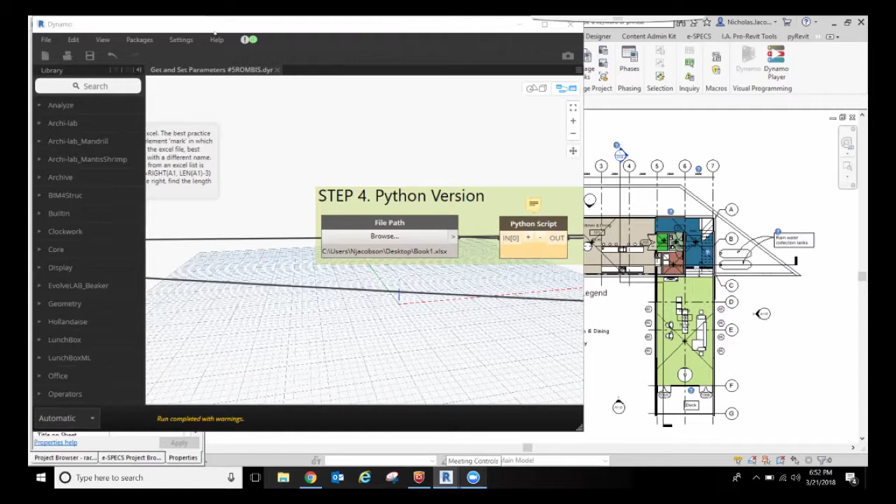Anytime I use Dynamo and we're experimenting, I always use the Revit sample project. I like to get in there and just destroy it because I'm not destroying any other project -- I can mess with it and always get it back. Through this, you start to find all these little, I don't know if they're errors or overlooked or intentional, but there's a lot of weird things. Were they done on purpose? I have to believe they're done on purpose, right? But we find all these sorts of things, so it's fun.

What I want to show you is we work on a lot of multifamily housing projects. When we're working through the projects, we number our rooms with a certain numbering sequence, and then the U.S. Postal Service comes back at some point and says, no, we want to rename them based on our numbering system. We take our best guess, it's never right. So all of a sudden we have a project with 1,600 doors, 800 rooms or something like that, and we have to go back and renumber every one based on the U.S. Postal Service, which means we also have to renumber our doors. We've gone through all that work of numbering our doors, and we put the letter next to it.

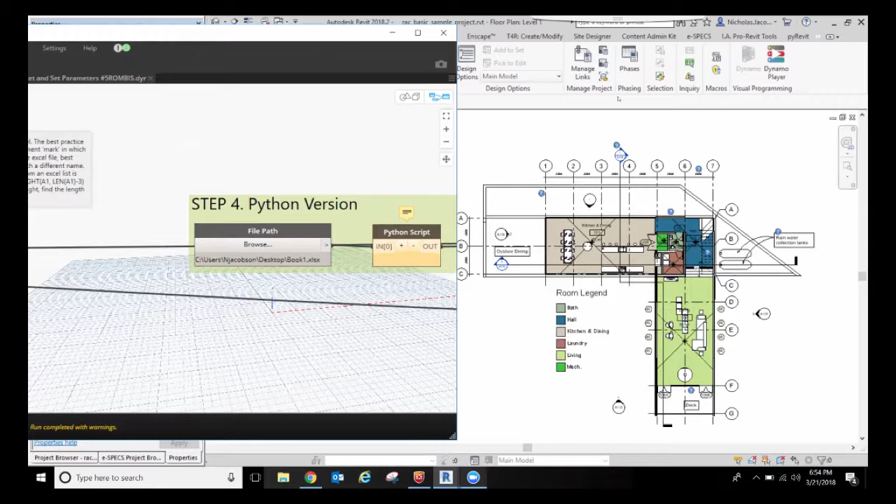The way we renumber doors -- and I'm buying time to tell you the logic, because if this doesn't work, at least you understand the logic, probably won't work, but the most important thing is understanding the thinking process -- we renumber our doors based on the way the door swings into the room. If it's swinging into the room, it gets the same number as the room it's swinging into. So this is room 8610, that would be door 8610A, 8610B. The A and the B are always there. It doesn't matter if the room changes, we still want that A and the B -- it saves a little time. So somebody comes to me and says, how do we renumber all of our doors to the room they're opening into, but save those letters? It's kind of trivial. If you do it manually, it would take you days for something with 800 rooms.

But this method will save you a lot of time.

I always work in Python because I have a lot more flexibility and I know it a lot better. So if somebody wants a script, I've done it in both long form Dynamo and also in Python. So that way you can go in, you can understand the mechanisms, what's going on. So if you get this, I don't know if we're going to pass them out, but you can get in there and you can start to play with it and you can understand what the mechanisms are and speak the

language of Revit. So what we're going to do here is we're going to get all of our doors as they are with the number and the letter. We're going to export that to Excel because Excel is like this awesome tool. Everything we do uses Excel because we can change things really quickly. So I'm going to export everything to Excel and then I have it. And now I can do anything I want with it. I can change the numbers sequentially. I can bring it back in.

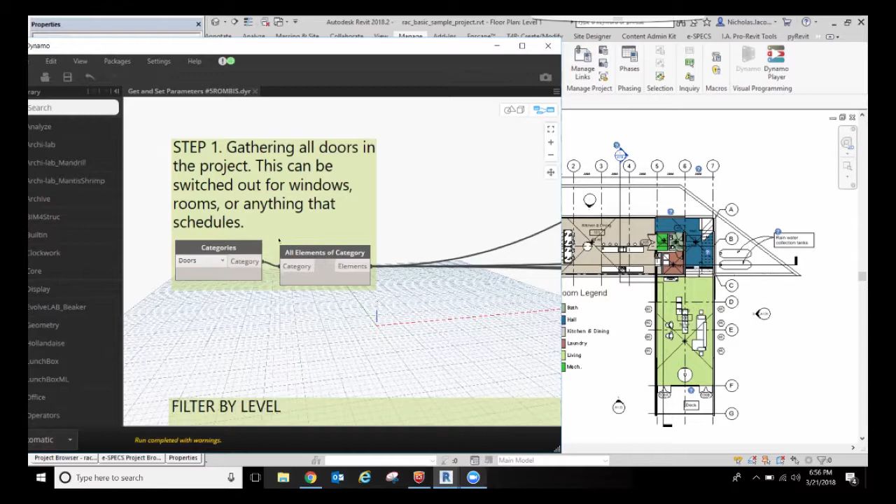What I'm going to do is I'm going to try to separate the door numbers from the door letters at first. So I keep all of those letters the same, get rid of the numbers. We don't need them. We have new room numbers. Then we're going to try to find the new rooms that the doors are opening into, get that number, and just put that on the front side of it. Pretty simple. So the first thing that we do is we get our categories.

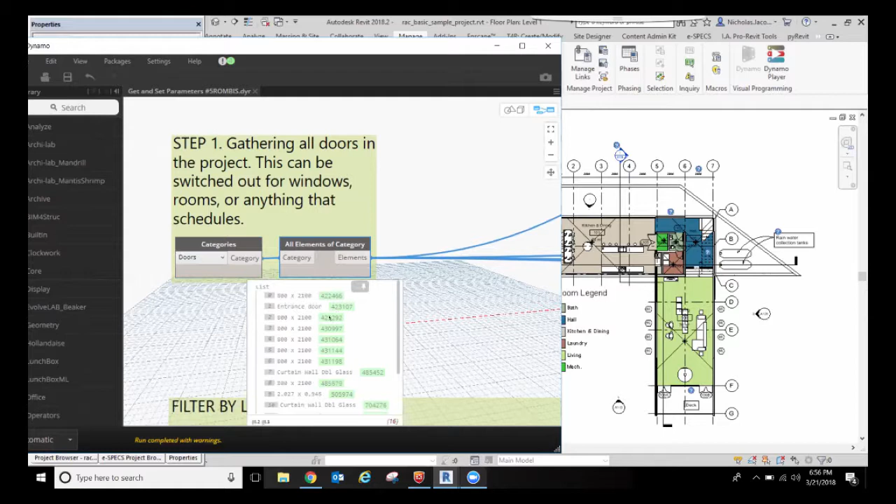This is a pretty standard way of starting, and we're going to get all of our doors, and we're going to get all of the elements of that category, which is basically getting all the parameters that are associated with this door. The cool thing with this is that we can go through and you can click on any one of these. And I'm lucky that mine is popping up. And I can click on one and it will take me to this door, which is this one right here. So it's a quick way of being able to access all of this information.

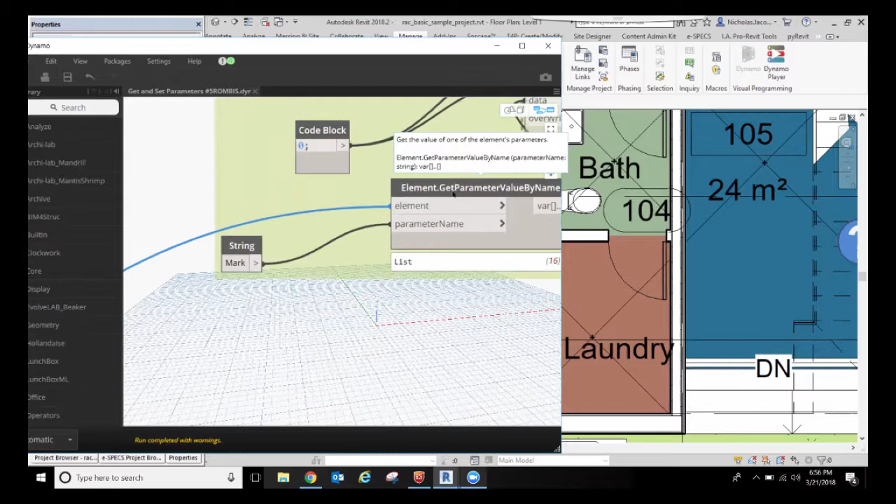Now that I have that, what I'm looking to do is, what I said, get the number and the letter. And so in Revit, that's known as the mark. And I will show you that right here. I know this is really simple, but it's helpful to see it all. Properties. Select. And what we're looking for is not the name, not the number, but the mark. This is 105. And here's what I'm talking about when the sample project is a little bit weird.

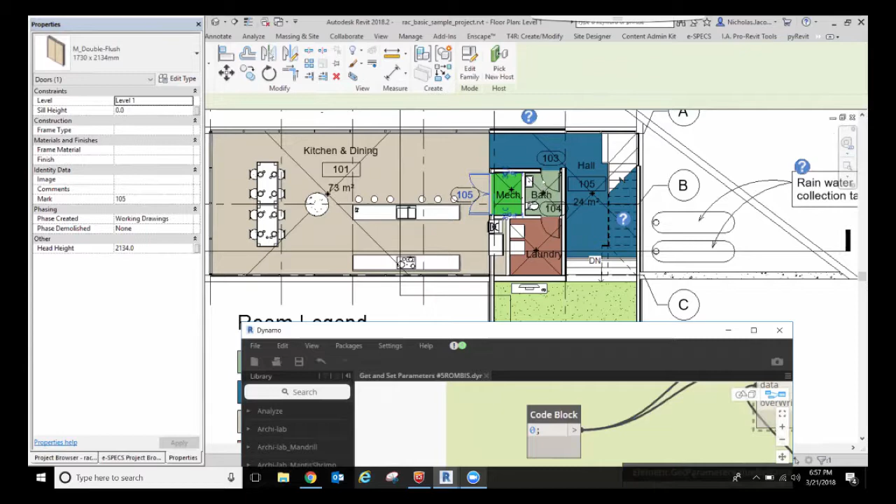All of these doors have the right number associated. So this is 103. It's going into 103. But this one right here is named 105. It's going into room 101. So there's all kinds of little things like that. As a sample, we're just going to change that. I'm going to change this to A. So we have that for proof of concept. And if this works, it should say 101A.

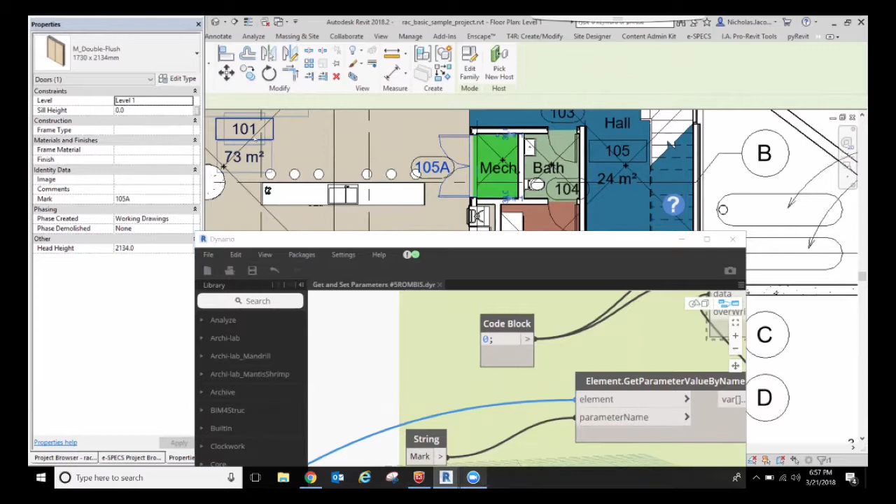So now that I have the mark, I'm going to use this little program that's write to Excel. This is right out of the box. We've already talked about this. I'm going to use a file path, and that file path is going to write to an Excel file. In order for this to work, you already have to write the file. So it's kind of a weird little workaround, but

I open up Excel. I'm going to start a basic project. I'm going to save it to my desktop. I'm going to say, in the spirit of RoMBIS, RoMBIS, save it to my desktop. And I can get out of that. Now, I'll use this file path command. I'll go back and I'll grab it. If you don't do that ahead of time, it won't let you. It's really kind of strange.

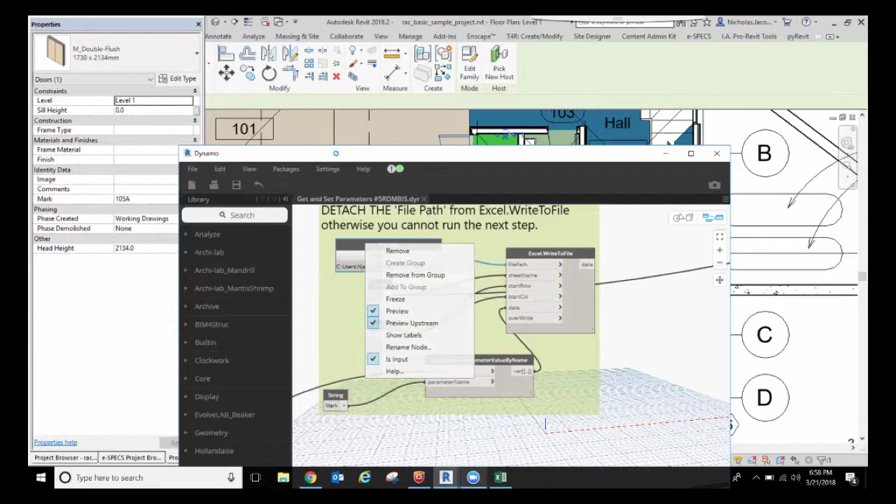I always freeze everything. That way it doesn't work when I don't want it to. And I always keep it at automatic. So that worked. Now I have all of my doors just as they were in Revit, only the mark. I should have 105A right here. Okay, cool.

Now, because I hate losing information and I'm kind of neurotic about it, what I'll do is I will save as, but with a different name after it. So that way I have a separate, fresh piece of information that I'm working with. I'll get out of that. And I like to keep all these things separate.

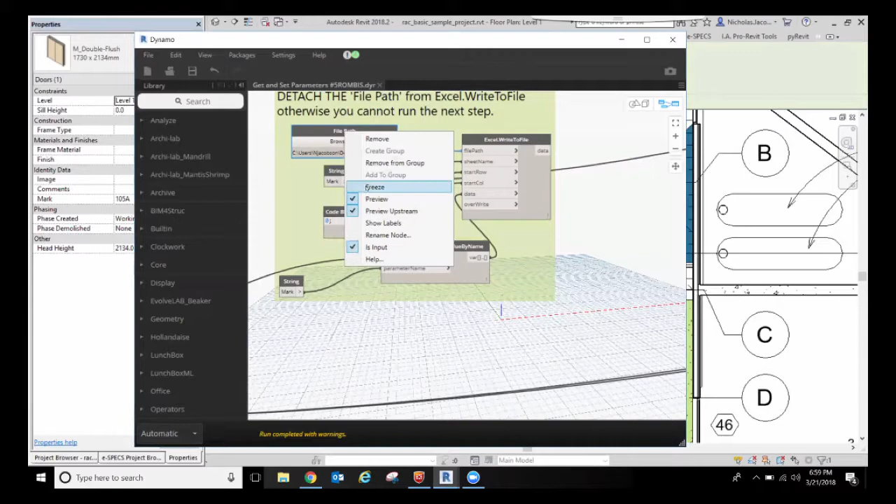So the next step is that I'm going to bring it back from Excel, but I'm going to modify it in Excel. I'm going to get rid of all of those numbers so I just keep the letters. And I will bring back my RoMBIS 1. And in RoMBIS 1, let me open this back up. I should have.

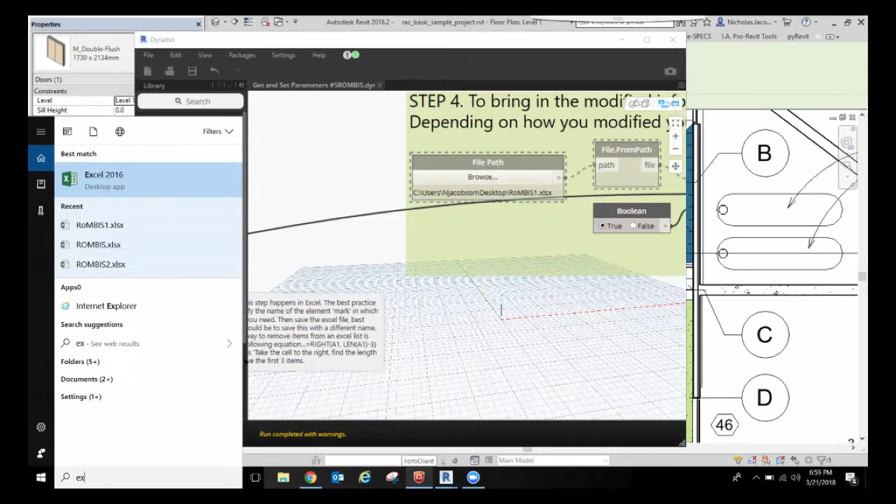Here's where I'm going to work on it. So there's a really cool hack, and you can even program in Excel. So what we're going to do is we're going to get rid of the first 3 letters here. And the way that you do it is type in RIGHT, which means I'm going to get whatever is to the right of my column, which is going to be A1. I'm going to calculate the length of it, starting at A1.

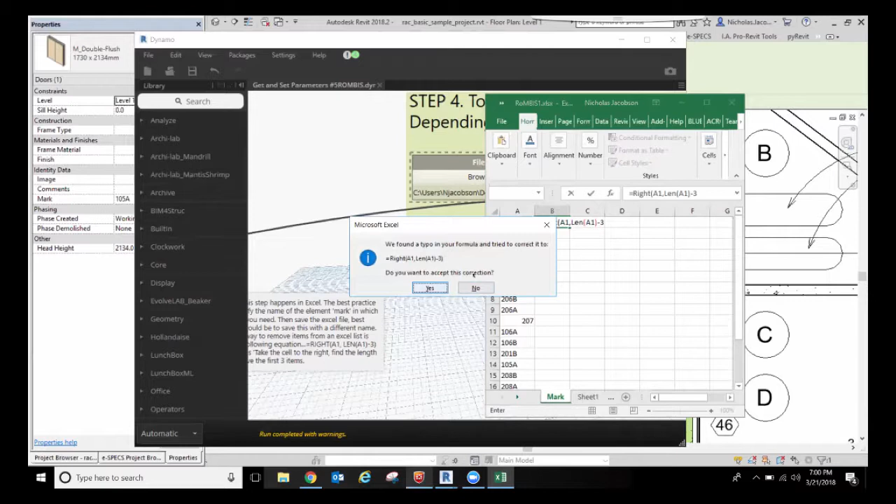And I'm going to subtract the first 3 numbers, starting from the left-hand side, right? Sure. Now that I have this, I can just pull this equation all the way down, and it automatically does this. So when you have 1,600 doors, that goes really quickly. And this is really what I want. Now I have this in a separate row as well.

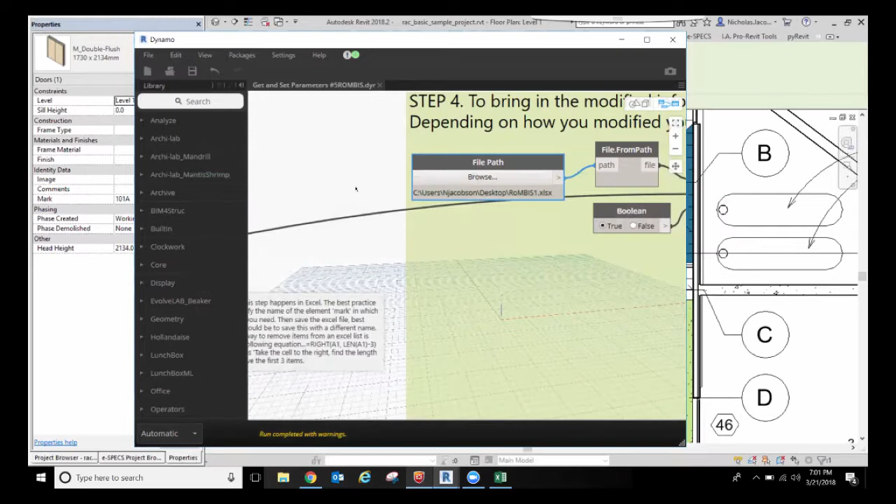I'm going to save, get out of this. I'm going to open this up one more time, and I'm going to unfreeze. And it opens for me. So what we're looking for then is the whole process: file from path, read from Excel. This is all pretty standard. The way that this comes in is broken out into 2 different lists. So I want to put them next to each other. It's kind of list management. I'm happy to explain in depth later.

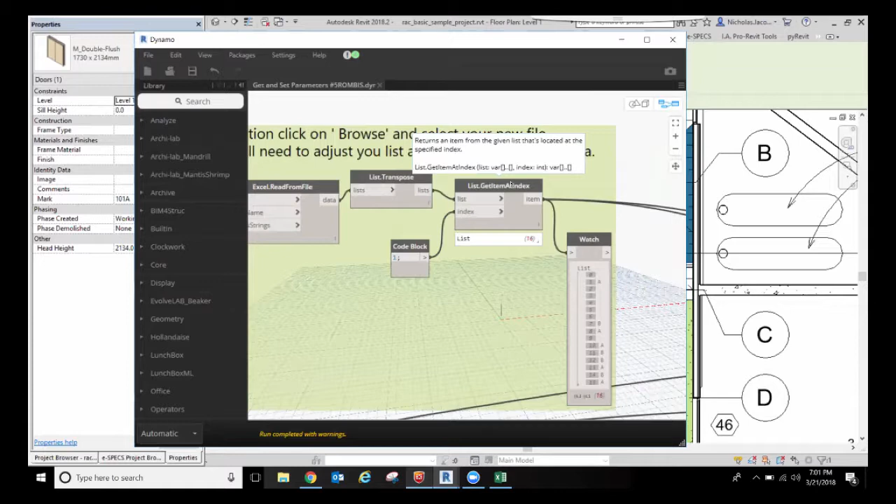And then what I want is I want to get an item at index. And my index is going to be that second row. So in Excel, I have basically row 1 and row 2, or row 0. In computation, you always count 0 as the beginning. So this is row 0 and this is row 1, and we want just the letters, meaning that that's the only part we want to keep.

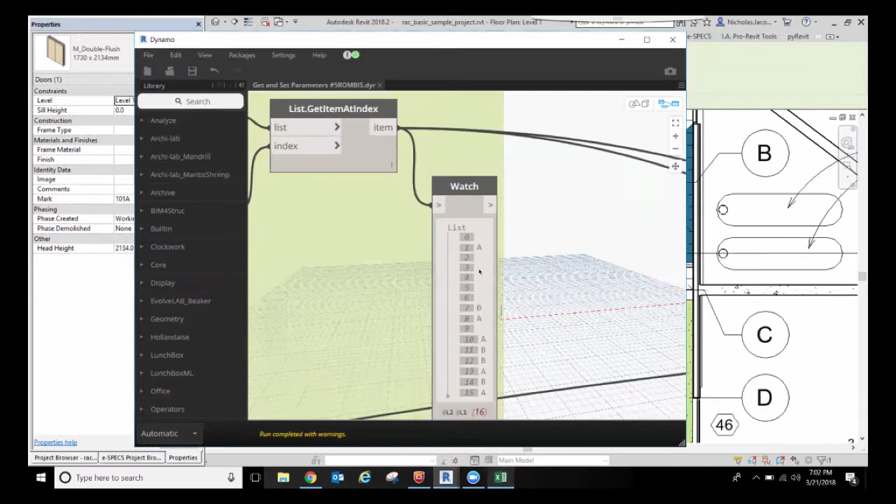And so this works. Now the next part is we want to get the parameter for the room that the door is opening into. We want to get whatever that number is. And the cool thing about Revit is that almost all doors have this already built into it. I don't know who the genius was that did that. That was you. I'll give you credit for that. But that's already there. All doors in Revit already know what room it's going into and what room it's coming from.

Caveat. Yes. If you copy a door, it keeps the previous room. Yeah. Can you repeat the question? So the caveat is there's 2 caveats actually. If you copy the door and you place it again, it keeps the parameters that it already had. And the other one is if you mirror it, it loses all of its information. So we also have other scripts that say, select all the doors that have been copied or mirrored, tell me who did it, and then I can yell at them and make them fix it. So we have that. There's a few little caveats.

But the cool thing is it already has information. So there's a couple different programs out there. There's one that you can download, and it's just get to from room. There's a whole bunch out there. You could even script it. And it's pretty simple. There's a little Python script, but it's not too complicated. Basically, the Python script is saying, get the to from room, put it here, separate it out by the to room and the from room.

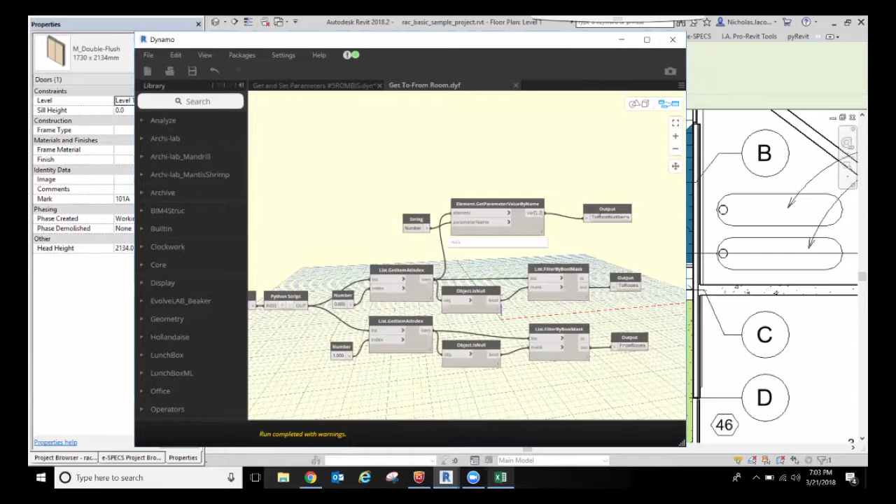And then I modify this. And the cool thing about once you start to understand this and you start to understand Python is you can modify it for your own uses. I'm just getting the number of the room that it's going into. So once I have that, it's telling me, here's all of the rooms, and I'm appending them to the letters. I'm putting the room number before the letter.

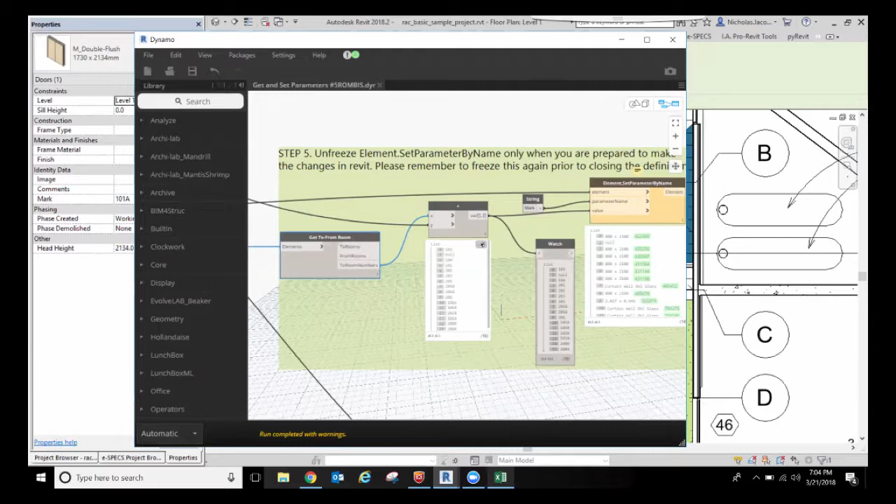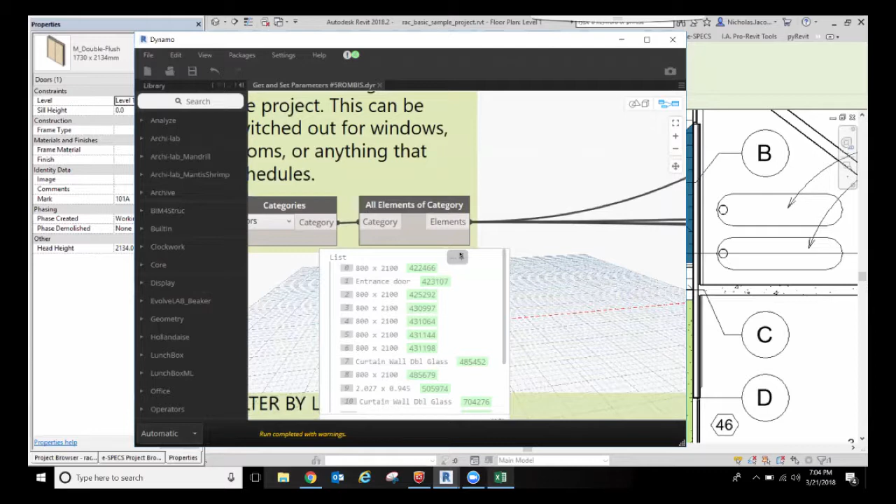Frustrating thing is, if you see number 1 right here, it says null. So if I were to run that, I would get all kinds of problems, like this. It would say there's something wrong. So if I go back to the very beginning, and this is a little bit of debugging 101, it was in the first position, and let's find out what that was. It's an exterior door. Most exterior doors, there's not a room on the other side of it. So one of the little hacks that we use is I go and I find that door.

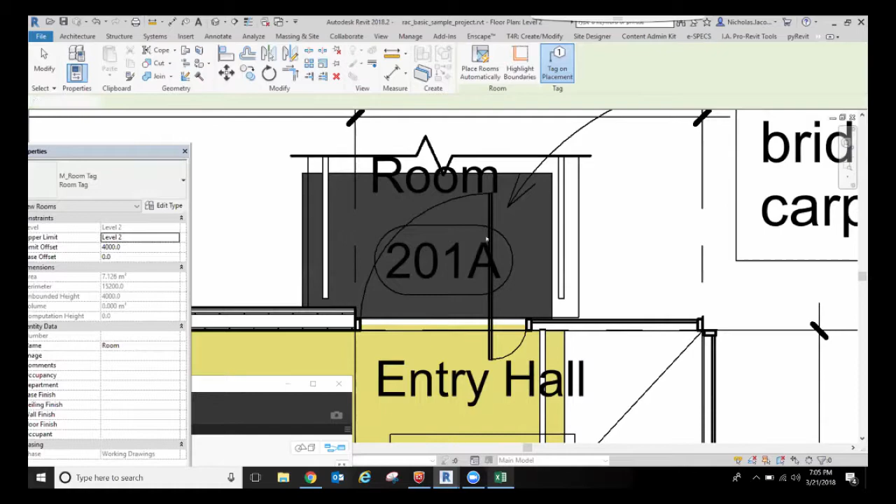Oops. It always tells you you can't find it, but then it does. I don't know. Bring this down. Architecture, room separator. No. And I will make a little room around here just to show you that's what the issue is. Okay. And because I have that set to automatic, it's going to run. And we'll zoom back out. And with any luck, that null is now taken up with 209A.

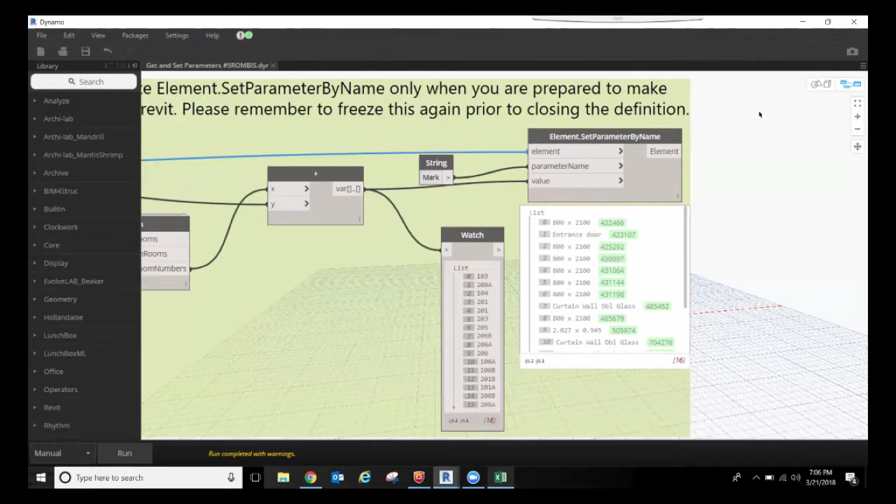The whole issue is set, and the program has already run. And just to make sure, run it again. This last bit, anytime in Dynamo it says set, that's kind of like bake in Rhino. It's giving the handshake back to Revit and doing something. Get is getting information from Revit, and set is putting it back and actually doing something. So it's one of the last things you want to do, because if you're not 100% sure, you'll screw stuff up. So now that we have that, I'll go back, and with any luck, my room 101A will be there.

Did you bring the element ID with it, though, so that it tracks it differently? You know, you probably can. We've gone down this route before, and I've just found this to be a lot quicker. Because what we have done, if you follow it far enough, you end up deleting things or things get shifted. This I know for sure works.

And there's probably a way to do that a little bit more, but we haven't explored it just because this has been so quick. And usually with these scripts, we spend maybe half an hour on them, and then we're on to the next one because we don't have a budget for R&D yet. But hopefully with being able to show this, like last week we used this and we were able to save billing additional services to a client. That starts to get noticed. And then you can slowly work into getting more and more R&D and playtime and working on design.

Just back to the caveat, have you found a workaround for that? Our workaround is just to find them and correct them. Okay. Because we had a CAD file of the building model in Revit. And when they got in there and started adding doors, they just started copying. Sure. So it's got all the old room numbers on the fronts. Yeah. The other workaround is just to model it right the first time. But that never happens.

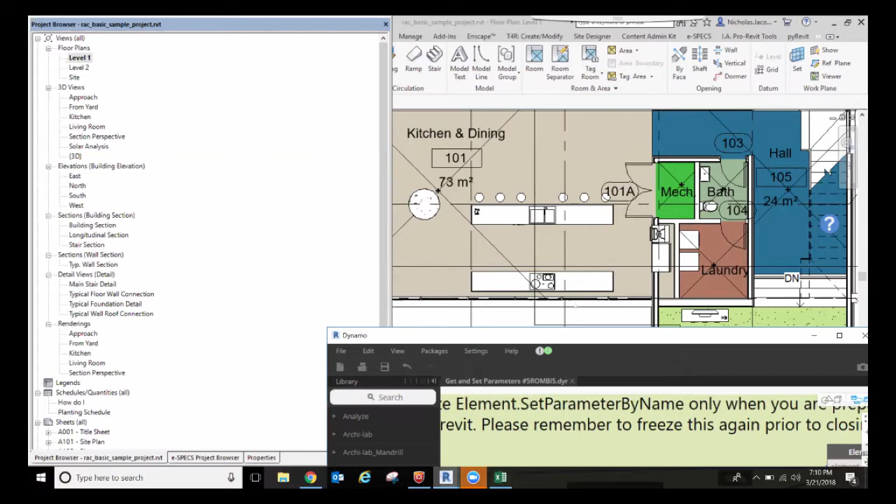I do. I didn't know if I had time for this. I don't have time for this, but I'm going to show you. Sure. So the question is, if you have such a big file that it's computationally too expensive, meaning you don't have the computational power to run through all of them, what's your next solution? The next solution is to break it up by level. There's all kinds of different ways that you could break this up.

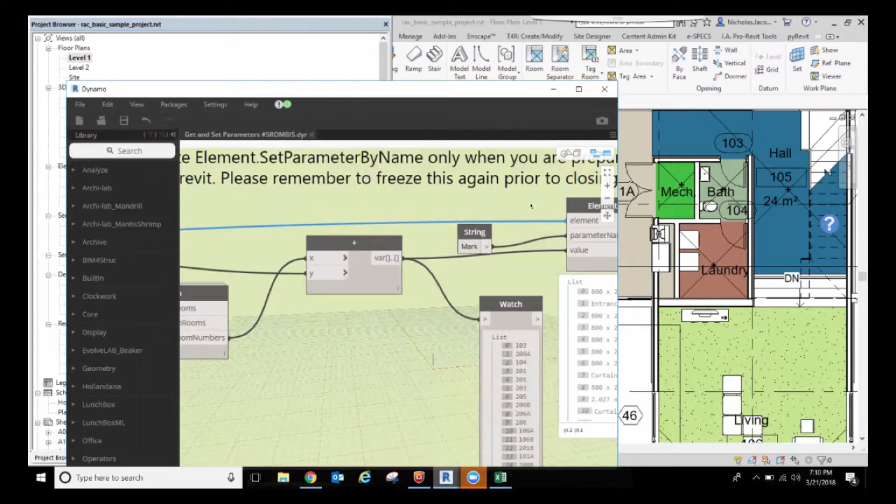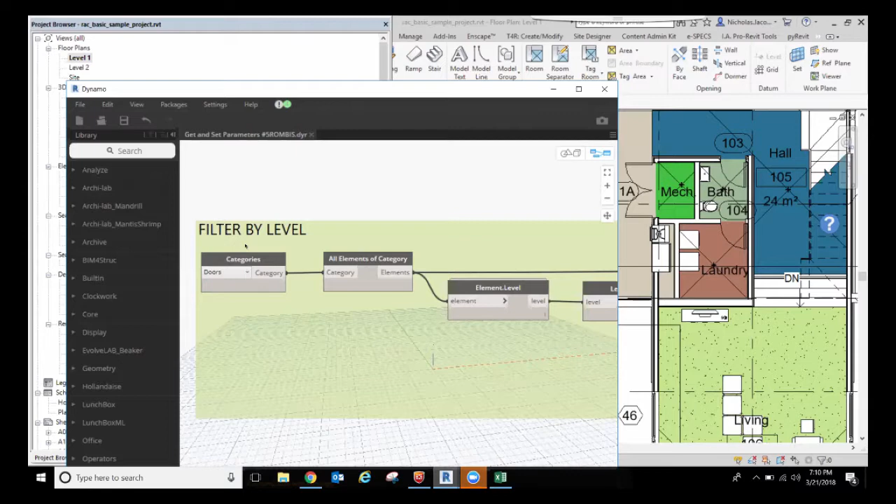So I wanted to also show, and I won't, but I'll just tell you that's possible, is that we can filter by level. So we'll get all the doors just by level 1 and run that through. Because last time somebody went through and said, oh, Nick, actually, I only need to redo levels 6 and 7. So it's really easy to then go back through and select level 1, level 2, or levels 1 through 4 and work in chunks. There's all kinds of great ways to filter.